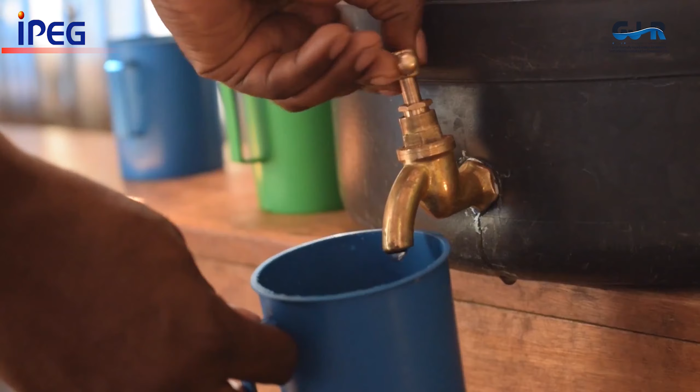Water is a fundamental right for everyone that needs to be guaranteed to each and every one of us. But across the globe, there are over 1 billion people who don't have access to fresh water. And as a result, every 8 seconds a child somewhere dies from waterborne diseases.

Exposure to contaminated water spreads waterborne illnesses among people. For the public, such unclean waters are a bigger threat than the devastations of war. Water is an absolute necessity for life. To create a world that guarantees equal distribution of potable water for all of mankind is a basic welfare that we as humanity must strive to achieve.

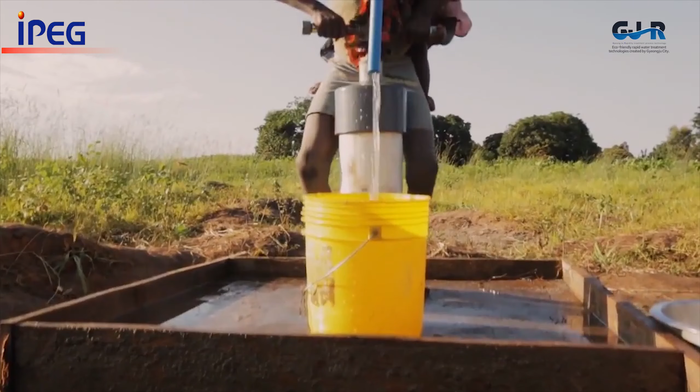Gyeongju, a green city that balances people and nature, life and love. A city beyond being a world cultural heritage city. Gyeongju was the first self-governing city in Korea to establish a Clean Water Institute in 2012.

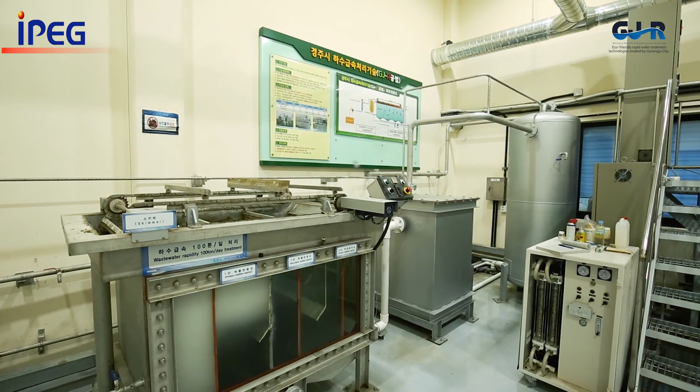Through preliminary surveys and continuous development of on-site technologies, in 2014, Gyeongju acquired its first domestic and international patent for wellspring technologies. And through innovative water treatment engineering, Gyeongju has now become a pioneering city, leading the water industry on a global front. The Gyeongju Rapidity, or GJR process, utilizes high-speed coagulation devices and microbubble coating methodologies together to quickly clarify wastewater during the flotation process, which is the primary treatment.

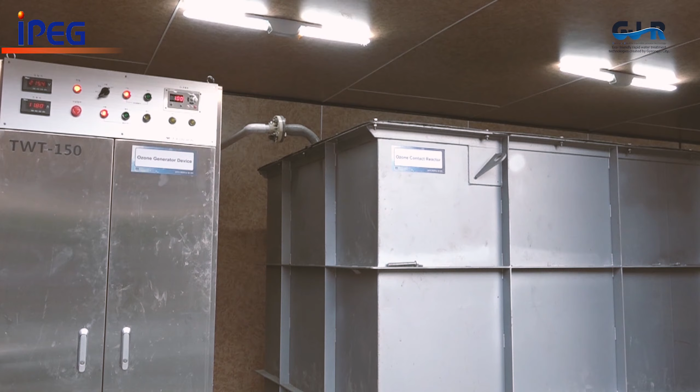The wastewater then undergoes a circulative ozone phase, which reduces what once took over 12 hours to process waste sewage down to 30 minutes, thanks to Korea's first innovative chemical physics processing.

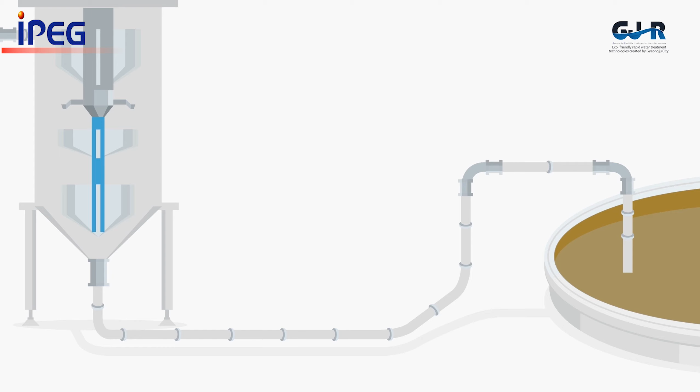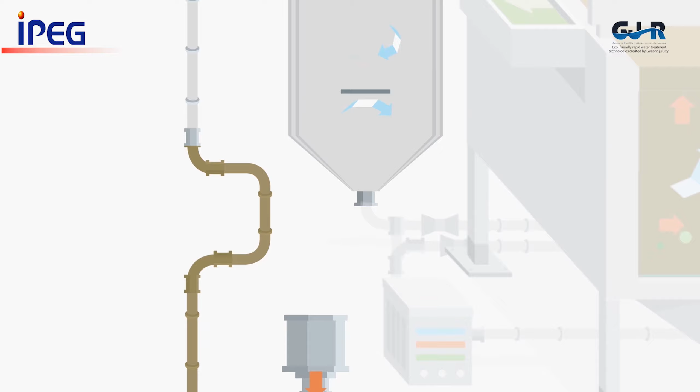Unlike the standard chemical flocculation and coagulation wastewater treatment method, the spiral vortex inline rapid condensation system creates a turbulent current as well as a vortex that induces flocculation and coagulation in phases, which prevents outside exposure, thereby drastically reducing foul smells considerably. The second phase includes a non-powered floc cohesion apparatus and the multi-stage partition-type flotation unit that induces the bombardment of floc, which improves cohesion and coagulation.

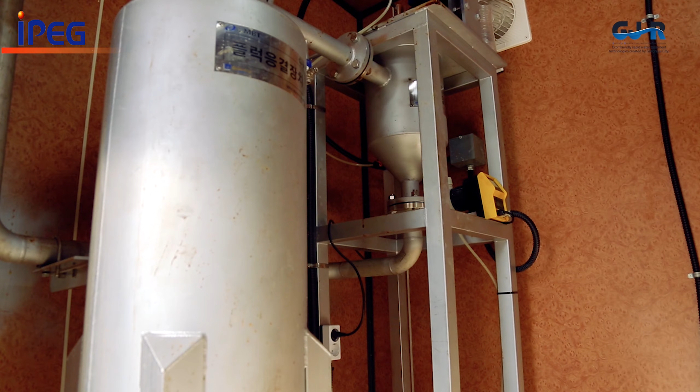It doesn't require agents nor additional energy costs, and since it is enclosed, maintenance becomes much easier.

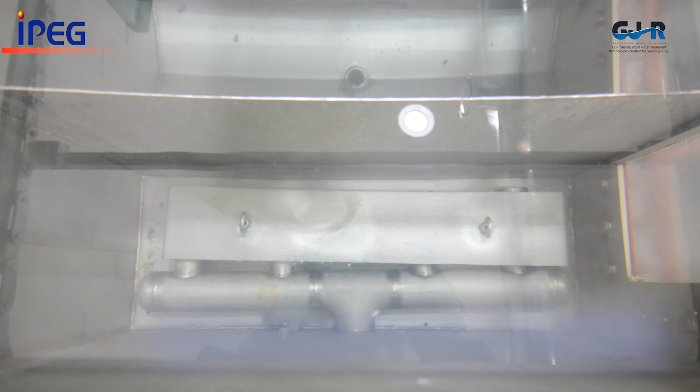Wastewater that has undergone these two phases is then sent to microbubble flotation, or MBF, tanks. Here, suspended solids and organic matter are coated with ultra-fine microbubbles, which remain saturated in the bubble generator tanks as considerably more solids and organic matter rise to the top.

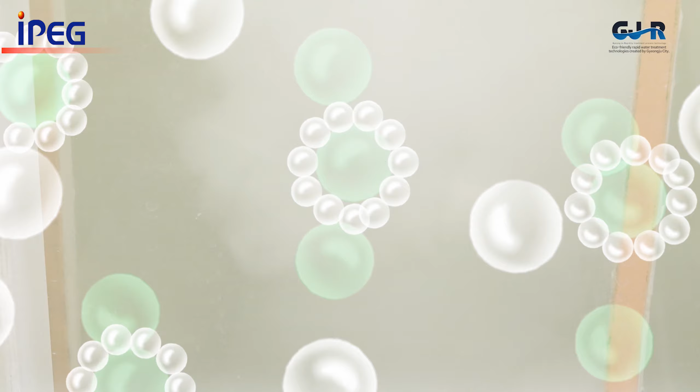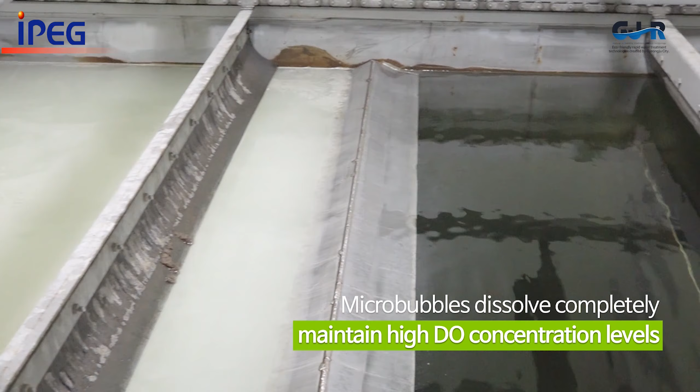And particles that haven't been removed yet from the first bubble generator tanks are then sent to a second and third bubble tank. This is the first preliminary treatment. The MBF is the multi-stage partition type where, unlike standardized flotation equipment, it has proven high flotation efficiency rates and as such boasts excellent, stable and safe treatment of water.

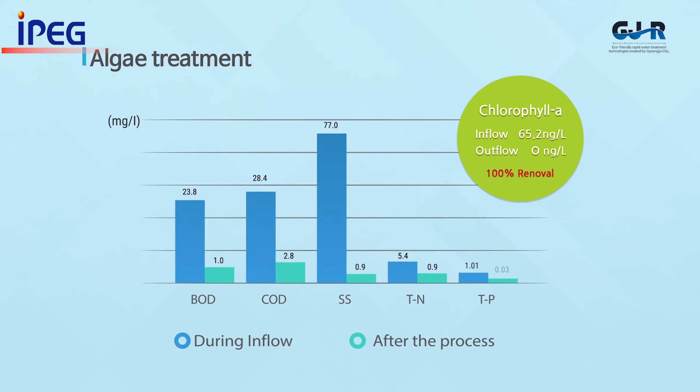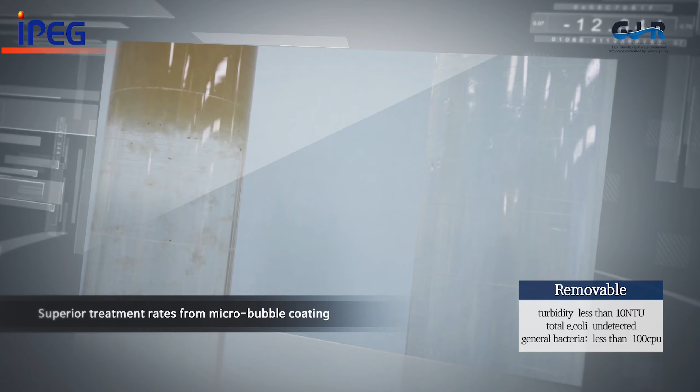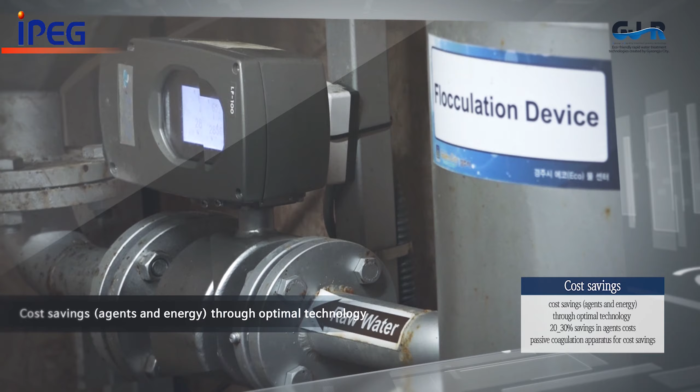With the shortest treatment timetable, the installation of the equipment takes up minimal space. The excellent treatment capabilities of the microbubble coating technology, simple maintenance through chemical physics processes, the most optimal methodologies that save costs involving chemical treatment and energy, and the flexibility of use towards water and sewage treatment, from wastewater treatment, controlled algal bloom, to clean water treatment.

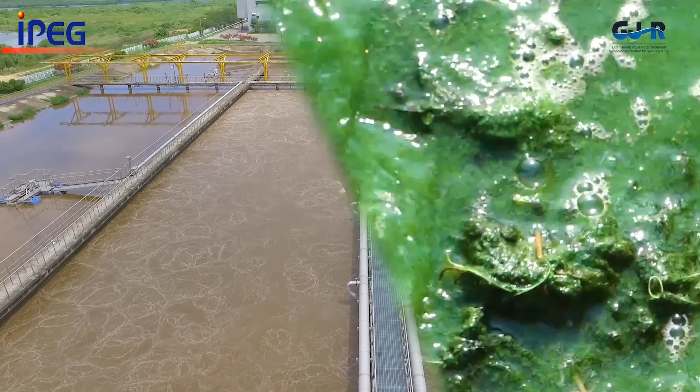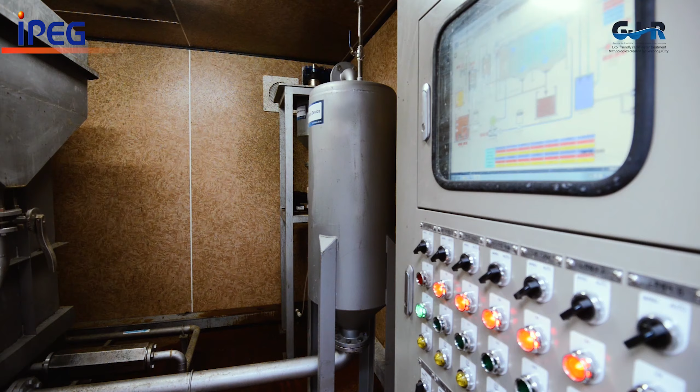The Gyeongju Rapidity treatment process ensures that everyone has access to clean water and the values it brings. It is shifting mainstream wastewater treatment methods, which take up a large footprint, to that of sustainable water treatment that takes up a much smaller footprint, thereby changing the way we deal with wastewater treatment systems.

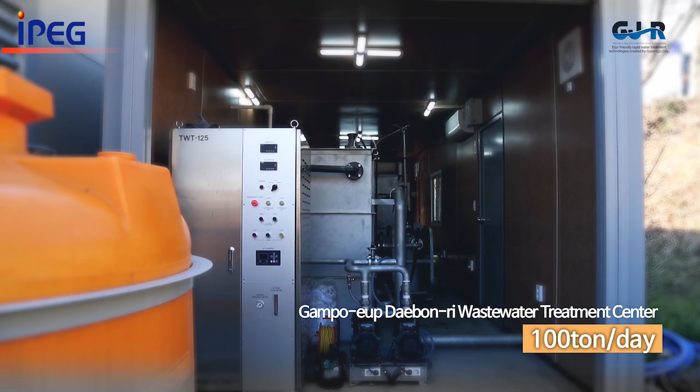Currently, wastewater treatment facilities located in Gyeongju's Daeheonri and Gampo-eup's Daebon-ri use this method. In addition, this revolutionary treatment method was successfully exported for the first time to Jakarta, Indonesia's water treatment administration, for installation and operation. And with technology sharing to Indonesia's Surabaya, GJR has been recognized by the world for its superiority.

With MOUs with Brazil's Sanepar in Parana, the world is turning its attention to the GJR treatment process as a proven success.

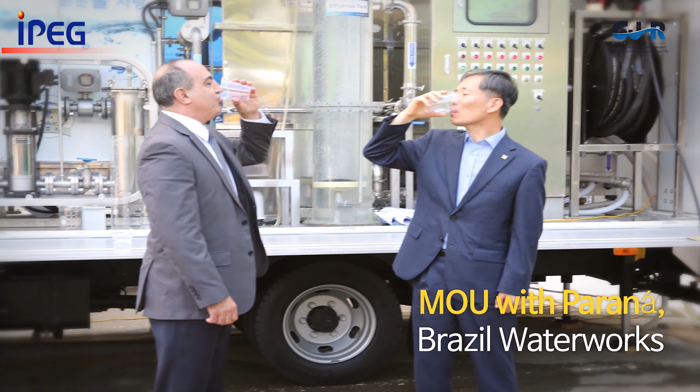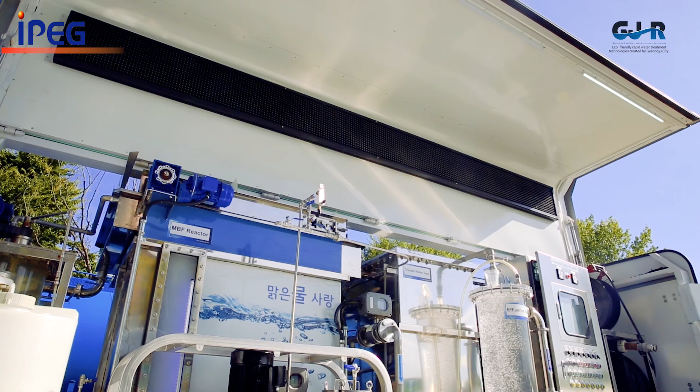The Gyeongju Rapidity treatment process can be operated via a mobile-based one-touch control system, allowing for customized operation and maintenance. And in the case of emergencies, mobile rapid treatment vehicles and containers capable of removing algal blooms while treating waste sewage are continuously being developed and operated through research and development.

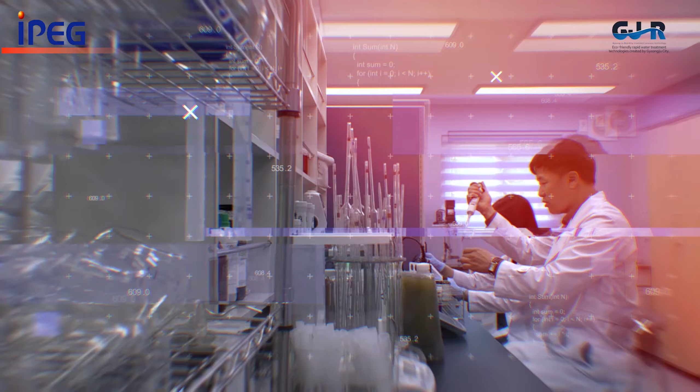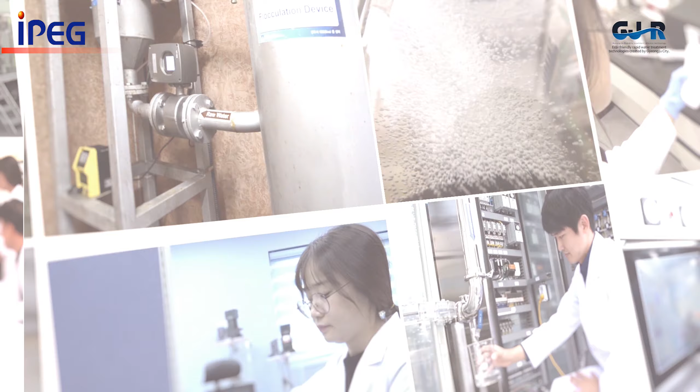From here on, the GJR treatment method will continue to adopt a long-term master plan and become a model example of innovating the water industry among the global market. For the actualization of fair and balanced water welfare, GJR will protect the precious value of water and aid in illuminating new life and paths as the most eco-friendly way of treating wastes.

The Green Gyeongju Rapidity Method is proudly opening new horizons through the world's most advanced technologies, ushering in security towards mankind's future.